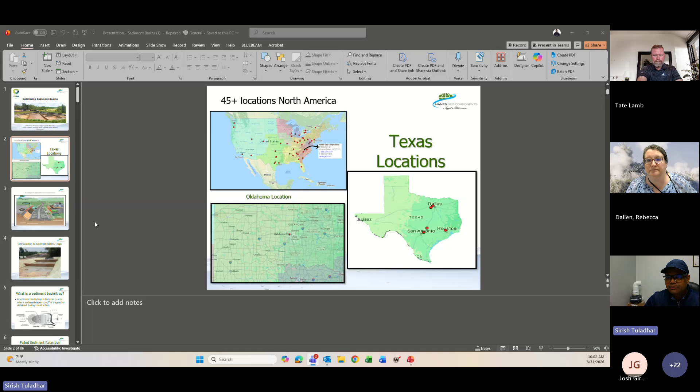Can you see my screen? Perfect, I'll share this one. Looking good? Yep, perfect. Let me just close the door real quick, sorry. Our office gets very loud as the day goes by.

Thank you, Rebecca, for a great introduction, and thank you Central Oklahoma Stormwater Alliance for this opportunity to present. The topic today will be optimizing sediment basins, but I'll be covering most of the products that Hanes carries, and we'll be talking about different ways to optimize the sediment basin.

Before I do that, I'm Sirish Tuladhar, technical sales engineer for the North Texas and Oklahoma area. And we have Tate Lamb, our Oklahoma regional sales manager as well. Do you want to say anything, Tate?

I'm happy to be here, Sirish. Thanks for taking the time to do this. Rebecca, thanks for bringing us in, as we're a new affiliate member of this organization, and hopefully this will be the first time many of you are meeting us, but maybe more to come. So thanks everyone for being here.

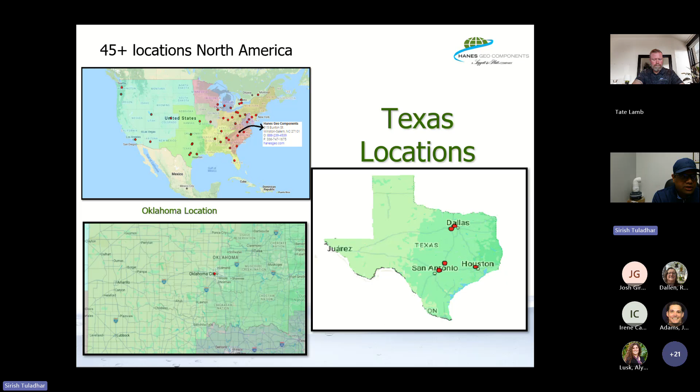Hanes products are categorized into 3 different groups. We have geosynthetics, which is mostly geogrid, geotextile, gabions, geomembranes, and also erosion control - we carry all kinds of light, medium, hard armor products like Flexamat. We also carry products from Solmax and light medium products like Pyramat and all that stuff. As far as sediment control, we carry all kinds of silt fence, wattles, anything you need. As far as stormwater, we have SD pipe, CMP pipe, and we also do quite a lot of underground retention and detention systems as well.

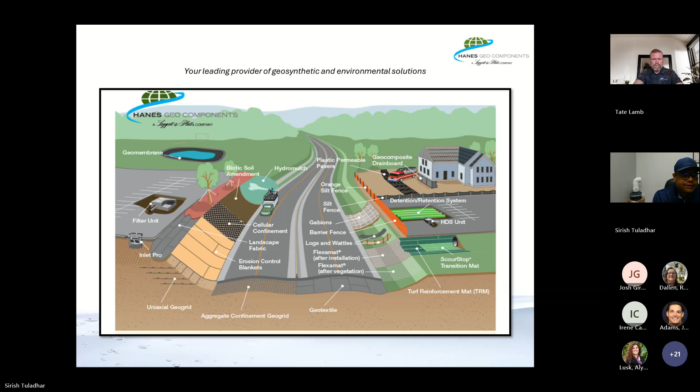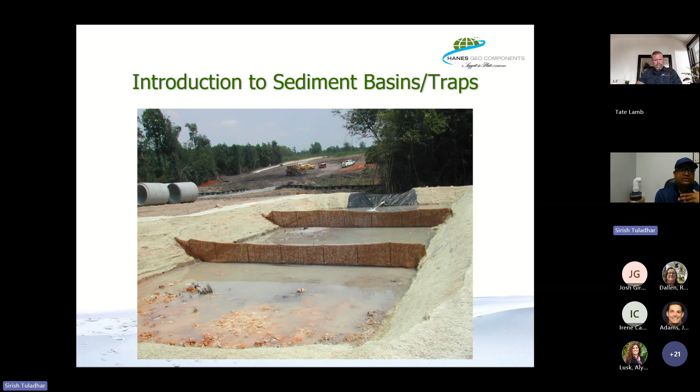So this is what I'm going to be focusing on, introduction to sediment basin trap. This is getting really common now. It started in North and South Carolina, Georgia, Alabama, Indiana. They commonly use the sediment basin, but it's slowly moving to the central South, like Texas, Oklahoma, and you see quite a lot of this in different projects. Especially in Texas, I see this every week, like 3 or 4 times. I have to design skimmers based on the sediment basins. So it's getting quite popular. Today, this series will try to educate a lot of engineers or contractors about sediment basins, how important it is in capturing the sediment.

So what is a sediment basin? A sediment basin is a temporary area where sediment-laden runoff is trapped or detained during construction. Basically, you're digging a hole and water flows in through a pipe or channel, and the dirt settles over time, and water is discharged through a pipe in a cleaner fashion. It might be a temporary or permanent sediment basin. You can see in the plan view, the water comes through a pipe or channel, first going through the turbulent zone, then through the laminar zone where most of the sediment settles, and then the cleaner water washes out through the outlet.

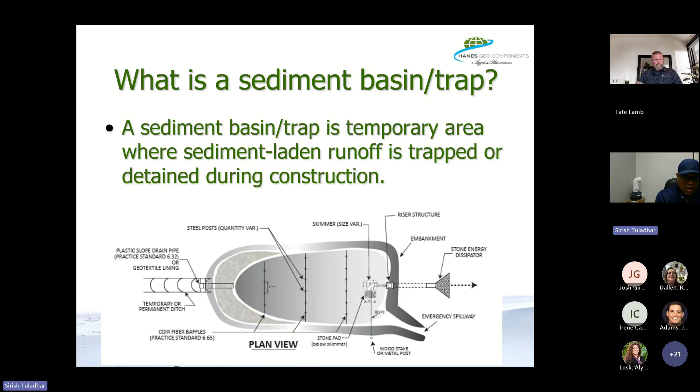So some of the reasons why we use sediment basins: first, you see on this picture, we sell silt fences, but they are not the strongest product to capture sediment. You see the picture on the right, the silt fence is about to fall down. It lasts about 3 to 4, maybe 6 months - it's not as strong. Also, you see the inlet protection - that's something you want to use in the job site to capture sediment before it enters, but it's something you do at the very end. So it's not great.

Some more reasons why we want to use sediment basins - you see on the picture on the left, the milk crate. I don't know what project that was or who decided to use that, but it's not a way to capture sediment.

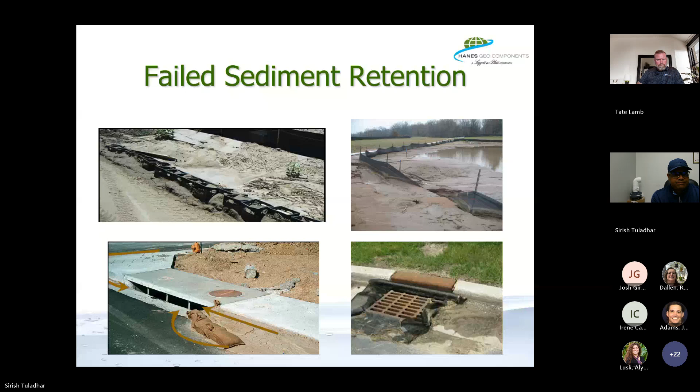So I took this course - this is a great course for any engineers or contractors - a designing and reviewing course on sediment and erosion control. In that course, the author, Jerald Fifield, who sadly passed away, I think about 4 or 5 months ago, was one of the pioneers of the CPESC certification. In that book, he says the only BMP that can create optimal conditions for removing suspended particles out of runoff water are sediment basins and traps, also known as sediment containment systems. These design structures have the potential to remove 75% or more of suspended solids found in runoff water.

So today we're going to talk about how to get 90 to 95% capture of sediment by using different products that Hanes carries, or other products available in the market.

So some more reasons why we use sediment basins - the DEQ, Department of Environmental Quality in Oklahoma, and also Texas Commission on Environmental Quality, for common drainage locations that serve an area with 10 or more acres disturbed at one time, require it to be sized to contain a 2-year, 24-hour storm event - a sediment basin is required. But in Texas, we use sediment basins even at 5 acres. I cover a pretty large area, from Dallas to Fort Worth to almost El Paso. Especially in Dallas it's 10 acres, and in Fort Worth it's more like 5 acres disturbed before you need a sediment basin. Same thing with Oklahoma City as well.

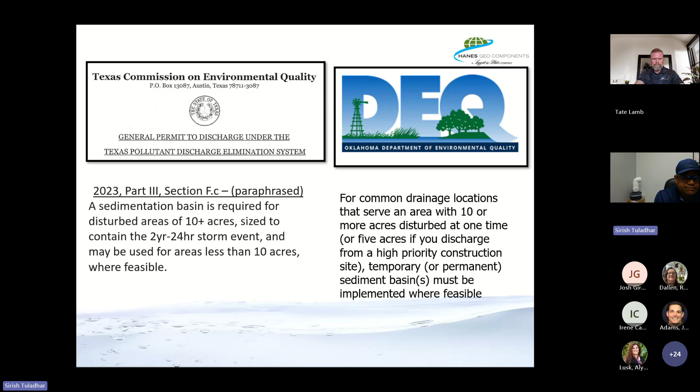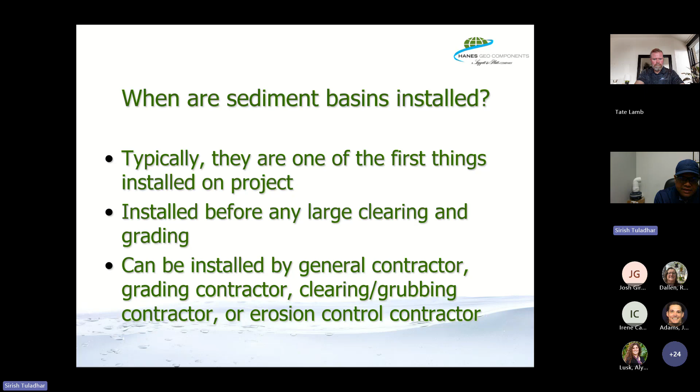So when are sediment basins installed? Typically, they are one of the first things installed in a project, installed before any clearing and grading is done, and can be installed by any general contractor, grading contractor, clearing and grubbing contractor, and also erosion control contractor. This is the first thing you want to install - whenever you're installing the silt fence, it goes along with the silt fence. It's a great application to capture sediment.

It's orange juice ready to be drunk, right? Suppose you're coming back from a vacation, and in 5 or 6 days you come back and look at the fridge, you see all the pulp in that orange juice settled down, right? That's a similar way the sediment basin works as well.

Basically, it's the drag force, right? There's different particles in water, and they settle in different time. I'll talk more in detail in the next slide. Bigger particles like gravel have a bigger drag force, that's why they settle faster compared to other particles like silt and clay.

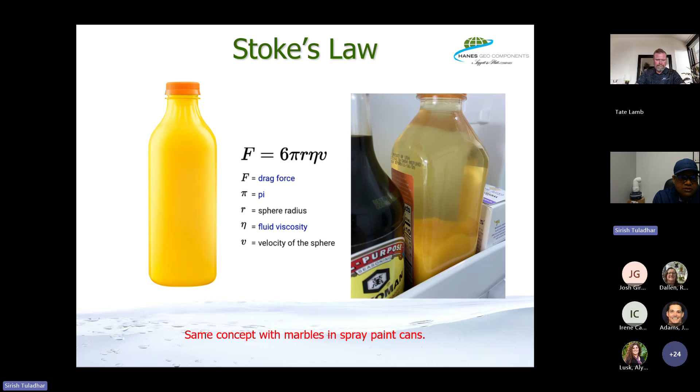So we're going to talk more in this presentation about flocculant as well. I have this soil water that I brought in from Howey, Texas, and I'll show you how some of these particles settle -- colloid particles -- within about 10 to 15 seconds by adding some of these polymers. I'll talk more about it in the very last slide.

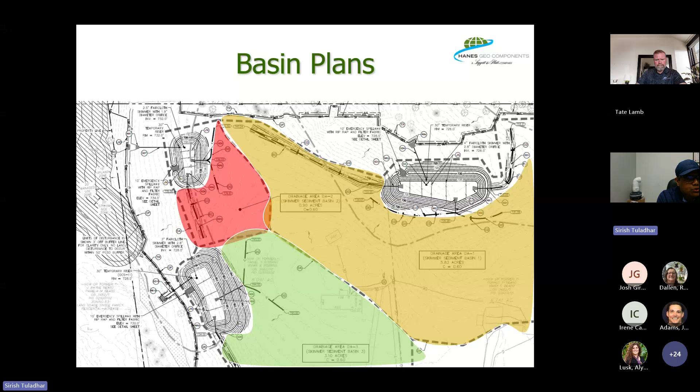So basically, this is how the drainage plans work. Anybody who is an engineer who designs sediment basins knows how the basin plans look. You see on this basin plan, the pond sediment basin on the right side is bigger compared to the sediment basin on the left side. The right side is actually 5.6 acres disturbed, so the sediment basin is a little bigger. Just an example to show you how the drainage plan looks for the sediment basin.

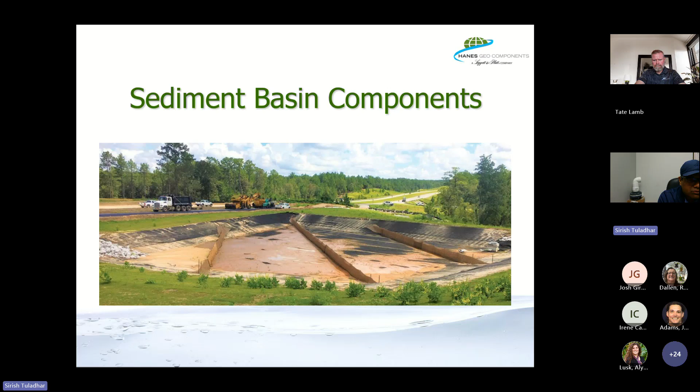So now we're going to talk about different components. We talked about just adding a sediment basin, you can get up to 75%, right? Now we're going to talk about different sediment basin components you can use to get that 90 to 95% capture of sediment. First would be inlet and forebays.

You don't see this quite a lot in Oklahoma or Texas -- a rock fill weir, also called a check dam, or a gabion forebay. It's basically a first barrier to really slow the water down, and it won't cost you a lot -- it's very cheap. Using this can get you up to 90% of sediment capture. This is something very cheap, and it's very good to capture sediment.

Next would be our newest product -- this is a newest product we introduced last year, Flexaberm, a really good check dam structure. It's actually reusable -- you can reuse this Flexaberm again and again. We've done quite a lot of projects in Texas. We haven't done one in Oklahoma yet, but soon we will.

I'll show you a quick look at what this product is. Basically, if anybody's familiar with Flexamat, it's actually a concrete block wrap, and we put a Curlex log in the middle. It's a great way to slow the water down and capture the sediment. It's a lot cheaper than regular check dams or rock berms as well. Another thing is those rock berms cannot be used again, but this one you can reuse again and again.

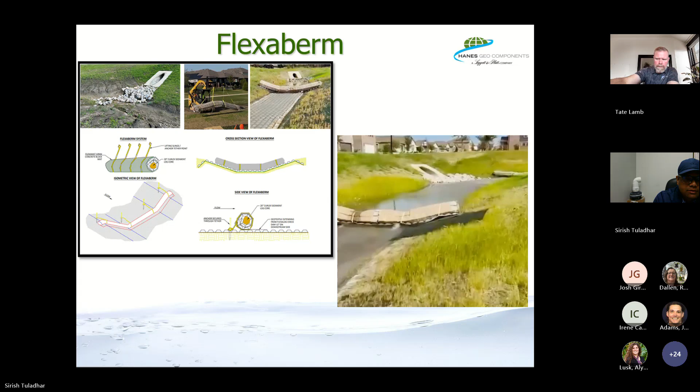So here's a really quick video to show you a project we did in Celina, Texas. You can see the water flowing through it, and at the back you can see all the ponding and sediment settling over time up there.

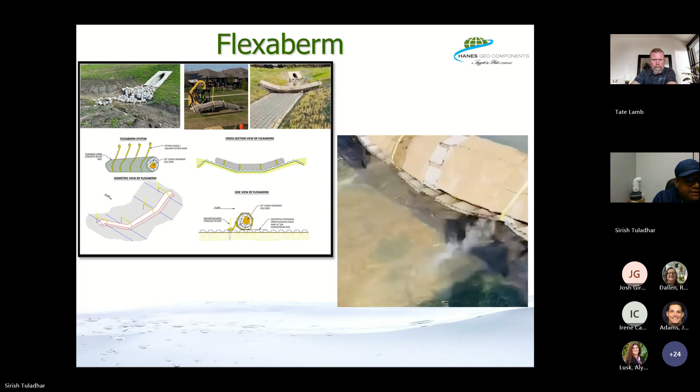Next would be geotextile fabric. It's another product -- you can basically get, for $500, a 15 feet by 300 roll. It's another product you can use under the riprap. If you're already building a sediment basin and you don't use this fabric, the water is just going to erode that whole thing and you'll have more sediment collecting in there. So it's just another product you can use in a sediment basin, geotextile fabric, only $500 to optimize the sediment basin.

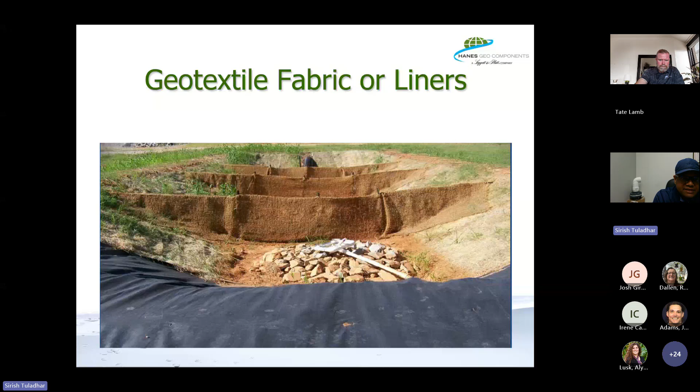Next would be coir baffles. You see quite a lot of this slowly getting into Texas as well. For anybody not familiar with coir, it comes from coconut tree, coconut husk. It's a great erosion control product. What you do in the sediment basin is you have three bays, bay 1, bay 2, and bay 3. You drill a 4 foot post every 4 feet horizontally, then put a coir mat around it and a 9-gauge wire wrapped around it with a T-post, and drape the coir mat over the wire. It's a great tool to slow down the water, and it spreads.

Especially in urban areas, university studies have looked at capture of different size microns, with the biggest captured in bay 1 and smallest in bay 2 and bay 3. It's very inexpensive, and it can greatly increase the chance of capturing the sediment.

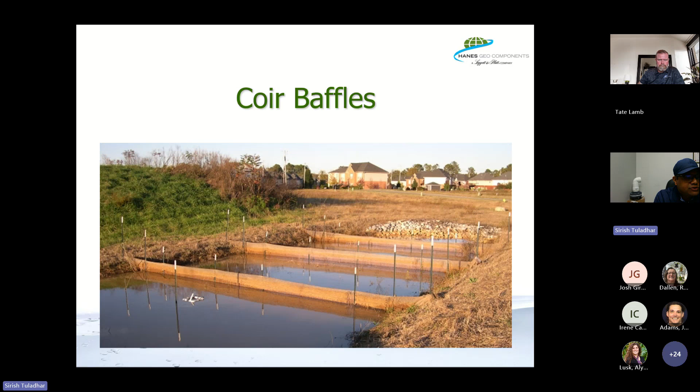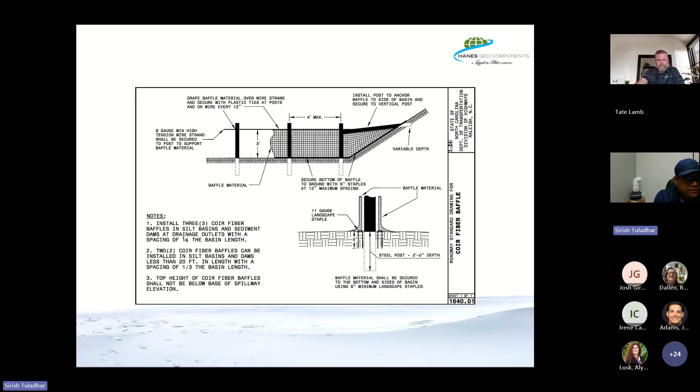Quick picture to show you what the baffle's function is. We have all these details as well, so we provide engineers, if they need some kind of sediment basin, details with the coir baffles and everything. We do provide that.

Next would be silt fence. It's another not-that-expensive product, another option. It's woven silt fence, an impervious baffle. As you see in this picture, water fills in the first bay, and you see a low weir at the very end. From there, when the water fills up, it jumps to the other weir, and then goes to the second baffle.

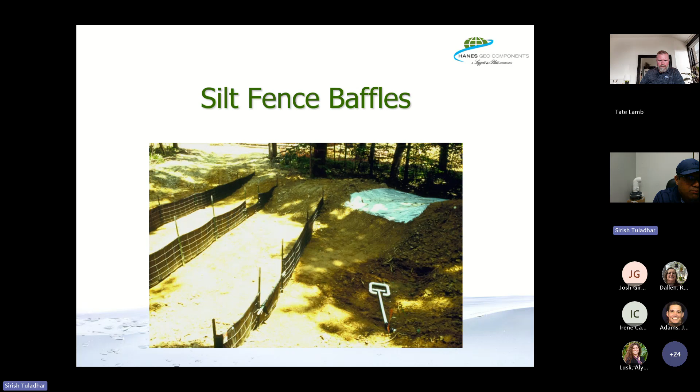As time passes, the dirt settles down and the water becomes cleaner. What it's actually doing is lengthening and buying time as the water goes through the weir. It settles on the first weir and then goes to the second weir. It's another cheap product, and since it's a pervious baffle, it's another way to optimize the sediment basin.

Next would be erosion control blankets. Hanes carries all kinds of erosion control. We also partner with American Excelsior, which is a great partner. We do quite a lot of their erosion control products like Curlex, the lighter Recyclex, and also Tri-Net Recyclex. We carry all kinds of erosion control blankets.

What I'm trying to say is you're already digging a sediment basin. Right after, you never know, in Texas or Oklahoma there's always rain. In my Dallas area where I live, it rains about 65 to 80 days per year. So when you're building a sediment basin, you want to protect the slope. As soon as the basin is done, you want to protect it with some erosion control blanket. What if you don't do that? All the sediment is going to get washed away and collected again. Since you're already building a basin, this is another cheap application you can use to optimize the sediment basin.

Next would be skimmers. It's another great product, basically a floating device. We'll talk in more detail about skimmers because we have a new skimmer in the market. We carry all kinds of skimmers, but especially this new skimmer that we came up with is a great way to reduce the cost. You're already building a basin and adding skimmers, which are not cheap. Bigger skimmers like 8 inch and above could cost you about $7,000 to $8,000. So we have a skimmer that can actually reduce that cost to half.

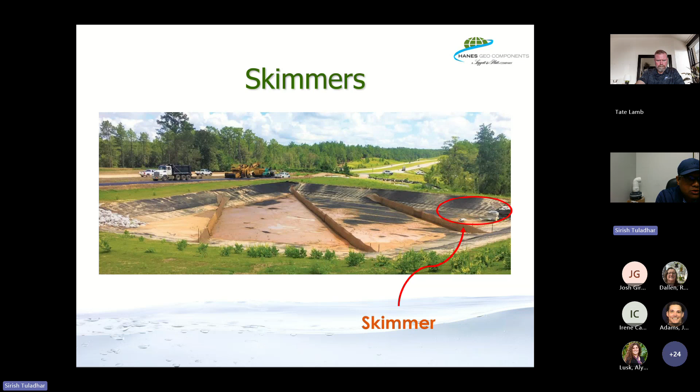It's basically a floating device. Over time, when the sediment settles down, the cleaner water is what goes out through the outlet structures like skimmers.

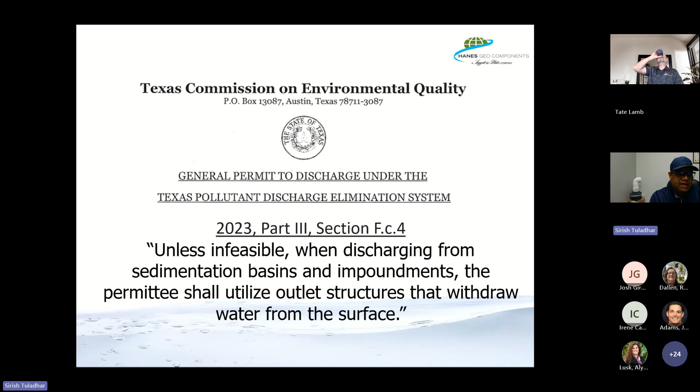This is another great slide, especially regarding TCEQ. There was a little change in 2023: when discharging the sediment basin and impoundment, the permittee shall utilize outlet structures that withdraw from the surface. I'm still getting into Oklahoma, just started, doing more research on it, trying to see if skimmers are required there or not. But especially here in Texas, most cities like Frisco and newer cities like Celina are implementing this, requiring water to be drained from the top by using skimmers.

So what does the skimmer do? Basically it floats. Over time, they have dry storage and wet storage in the pond, and the very top is the clean water. All the sediments settle down, and cleaner water is drained from the skimmer outlet as well. There are different kinds of skimmers in the market, and all of them are very good, but we'll talk about our skimmers in more detail.

Just a quick one to show you, you see on the very bottom, you can actually put like a gabion basket. You don't want to drain that very bottom dirty water. You want to let it settle down, and that's why we have that little rock at the bottom, about a foot of retention as well.

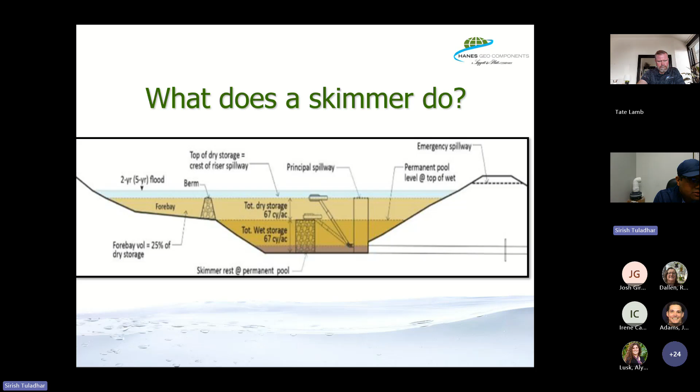So our first skimmers, there are different skimmers in the market. We have the Faircloth skimmer. We use quite a lot of these in North Texas as well. It's one of the grandfathers of skimmers, invented 25 years ago, one of the oldest in North Carolina as well.

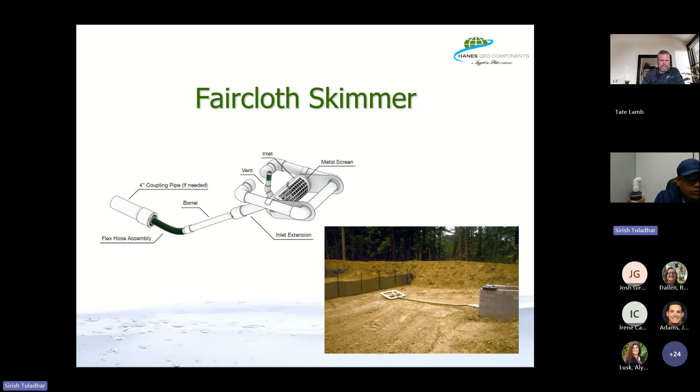And then we also have the Erosion Supply Company skimmer. We use quite a bit of these as well. You see they have 4 legs at the bottom. What it does is as it goes down, those legs stop it from draining that dirty water.

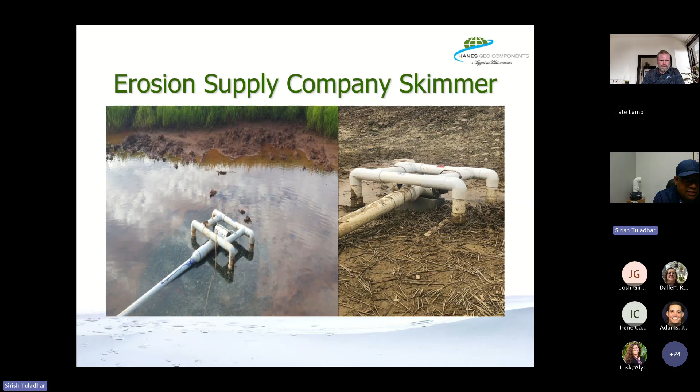Most of the skimmers you saw earlier are constant flow skimmers, but the one we have, the StormSkimmer, is a variable flow skimmer. As the depth increases, you see the valve at the bottom opens slowly. We have a slide for that, we'll show you more.

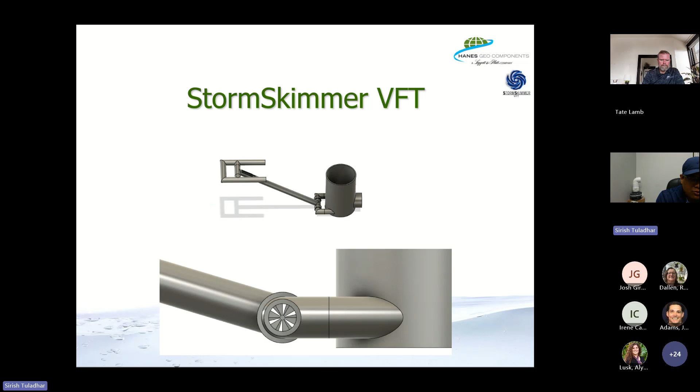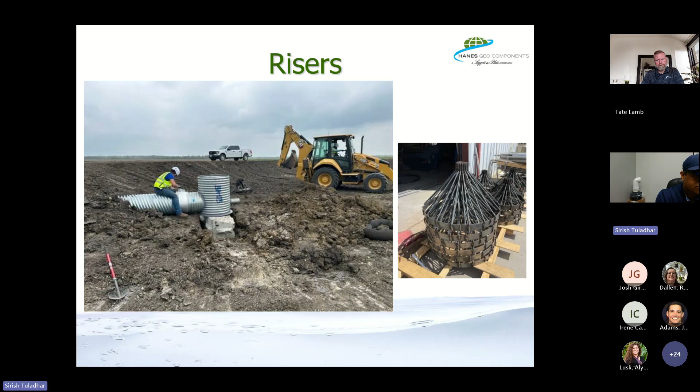We can also use TRM, turf reinforcement, as well for the spillway. It's a great product. Flexamat, if you don't know, is a 6.5 inch by 6.5 inch wide block, 2 and a quarter inch thick, cast in a geogrid, and it's great. It's one of the most used in different applications - you can use it in channels, outlets, landfills, shorelines. We also talked about the Flexiberm, which is part of Flexamat as well.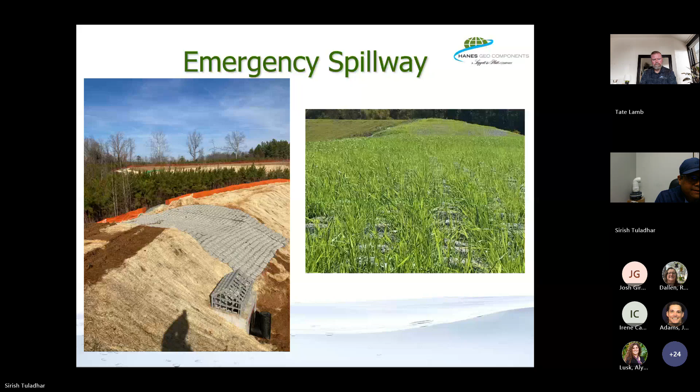This is how a stabilized basin should look. You want the basins to look like this - the inspector is happy when they see stuff like that. You see them on the forebays, most of the sediments are settled. As you go down, you'll see the baffles - bay 1, bay 2, bay 3. This is what the inspector wants to see, and they'll be very happy - the contractor is following the rules and doing a great job.

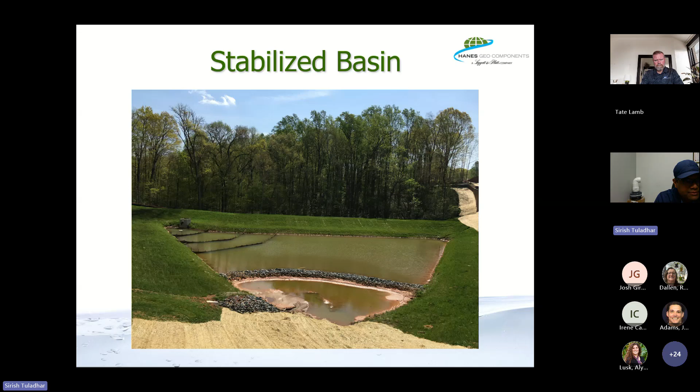This is another slide where you see a temporary basin. A lot of people ask, does the skimmer stay on forever? Technically not - once construction is complete and the entire project site is stabilized with vegetation, the skimmer device can be removed and you just plug that bottom in, replacing it either with the permanent outlet structure.

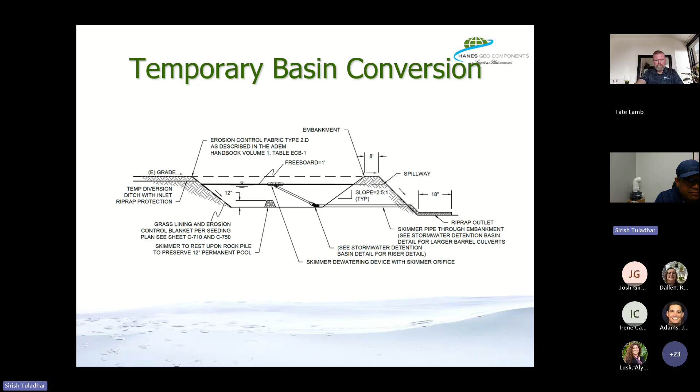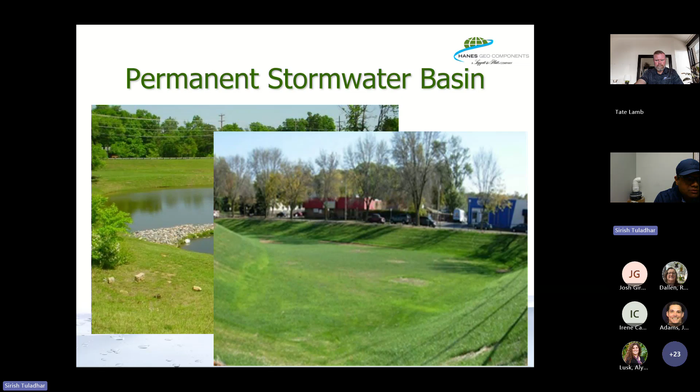Like in my next slide, you can see this is how the permanent stormwater basin looks. I see quite a lot of these in Oklahoma as well, and this is how it's sometimes seen - quite common in the DFW area.

Now I talked about different components to optimize the sediment basin, right? Next I'll be talking more about three things: the dimensions, a little bit about how to design it, and then I'll talk more about the flocculant.

We have a little soil sample here from Howey, Texas. I'll show you how fast these little polymers can settle the sediment quicker. And then we're going to talk about our newest skimmers in the market, the storm skimmer, in a little more detail.

And then you have particles like colloids, which never settle. Those particles are always the problem when the neighbors see a dirty pond and complain about it. So those are the colloid particles which never settle down.

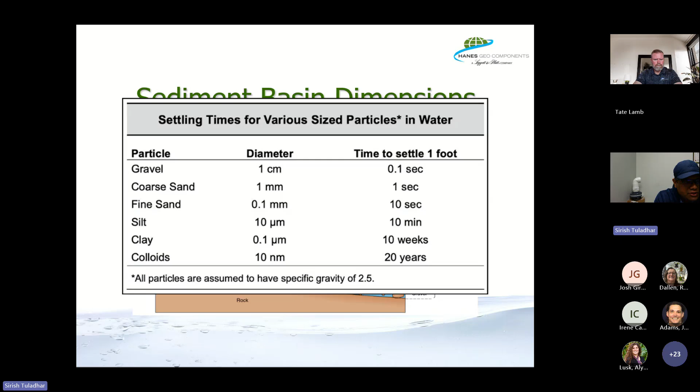Before we talk about how to size the pond and different aspects, we first need to talk about this. This is the slide we talked about earlier, how different particles settle. It's great to know how different particles behave before we design the sediment basin.

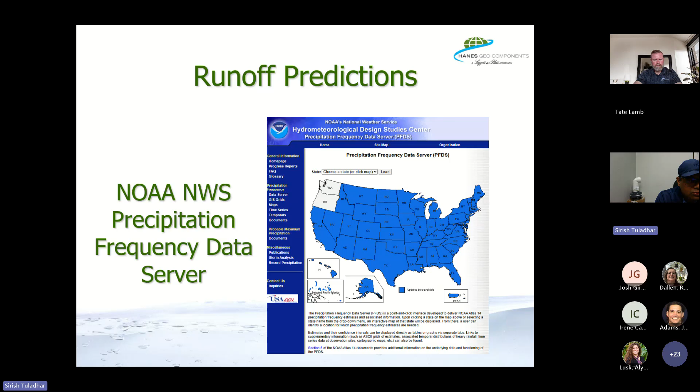This is another great resource, NOAA.gov. It's great because if you go there, you can actually find your 2-year, 24-hour rainfall data. It's a great tool NOAA has. Just like that, I took a quick example of rainfall data from 2 cities.

I took Amarillo, Texas, which is the Panhandle, and then I took the Tulsa, Oklahoma data. And you can see the 2-year, 24-hour event for Amarillo is about 2.72 inches, compared to Tulsa, Oklahoma, which is almost double.

Basically what I'm trying to show in this slide is, obviously if you disturb 100 acres in both areas, the pond in Oklahoma is going to be much bigger compared to Amarillo, Texas.

So per TCEQ or DEQ, when NOAA data is not available, or you're just doing a budgetary estimate, you can also use a simplified figure: 3,600 cubic feet per acre, especially for Oklahoma City or Texas. But if you go to a more arid climate, it's about 1,800 cubic feet per acre. And if you go a little bit north into a tropical climate, it's about 5,400 cubic feet per acre.

Basically what we're doing here is, if you take just 5 acres of land and want to find what volume is going to flow into that basin: 5 acres times 3,600 cubic feet per acre gives you 18,000 cubic feet required volume. So it's a great tool to find the volume of the basin.

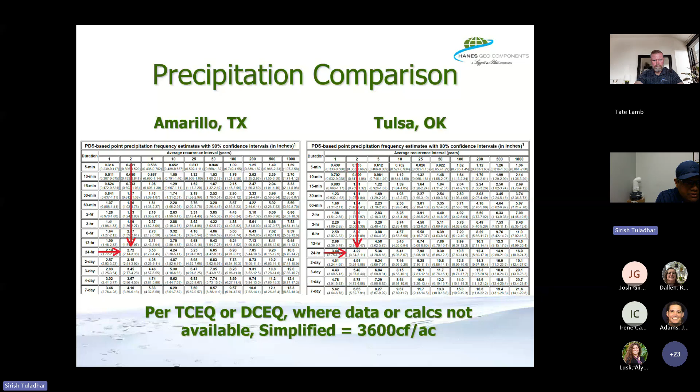Next would be sediment basin dimensions. When you talk about sediment basin dimensions, there's a happy medium, as far as length-to-width ratios or minimum average depth.

The water is basically coming through a channel and it goes through the turbulent zone where a lot of the bigger particles settle. And it goes through the laminar zone. The laminar zone is one of the important zones, that's where most of the sediment settles.

So you want to design a dimension that's perfect. You don't want to design like a 1-to-1 or a 6-to-1 ratio. If you have a 6-to-1, the water's not going to reach the other side. And if you have a 1-to-1 dimension, the water's just going to rifle through with higher velocity.

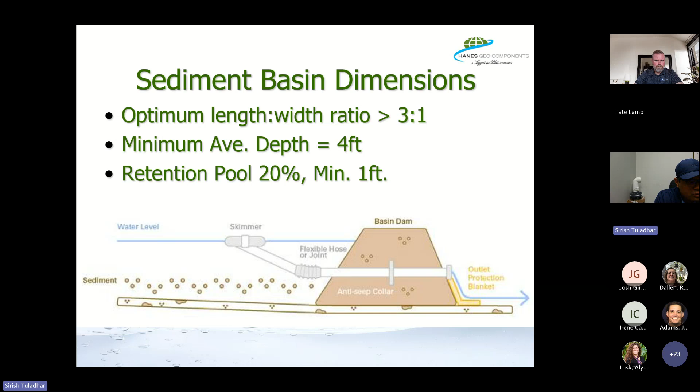And also this next slide, you see where the skimmers are connected, right? You can actually connect right through that, right below that dirt where the water settles. You can see that where it's connected to the berm, right? You can do that as well.

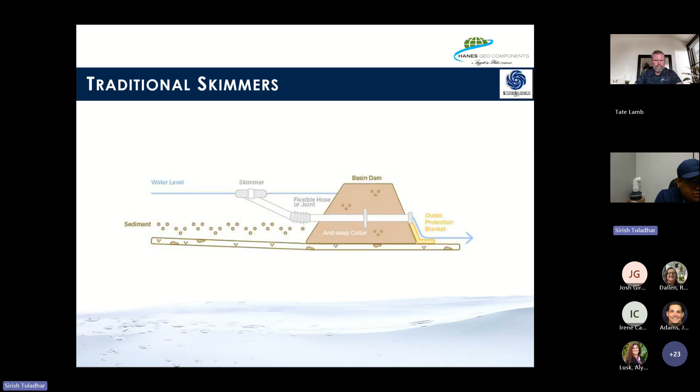Now we're going to talk about different traditional skimmers. We talked about the dimensions, right? Most of the skimmers you see in this market have a fixed orifice size. You see one on top, East Coast Erosion Supply, and they all have that common orifice on top, constant flow. I feel like it's designed mostly for smaller ponds, but everything is bigger in Texas or Oklahoma, right? That's why we came up with this new skimmer, a really, really good cost-saving skimmer, and it's actually a variable flow skimmer. We'll talk in more detail about it.

So basically, when you talk about traditional skimmers, you have basically 6 inches of head pressure. So no matter where it floats, 1 foot, 2 feet, wherever it floats in the water, the water is flowing at the same rate for all the skimmers, whether it floats at 1 foot, it doesn't care, right? But that is fine. But everything is bigger, like in Texas or Oklahoma.

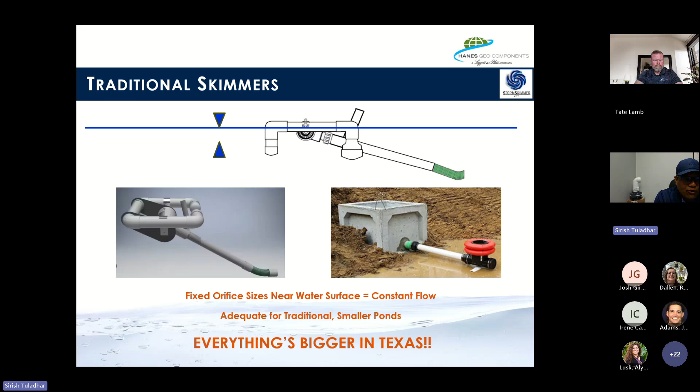That's why when we design a sediment basin, especially TCEQ or EPA tells you to design a pond for a 2-year 24-hour event, and we have to drain within 2 to 5 days. Some areas in the DFW area it's about 72 hours drain time, so basically you have about 3 days to drain it. But how does a sediment basin work? It works by the sediment settling over time, but we don't technically have the time because EPA tells us to drain within 3 days. The reason why is because the next storm is coming, and you want to hold as long as you want, but you have to drain in 72 hours. That's how you size the 2-year 24-hour event.

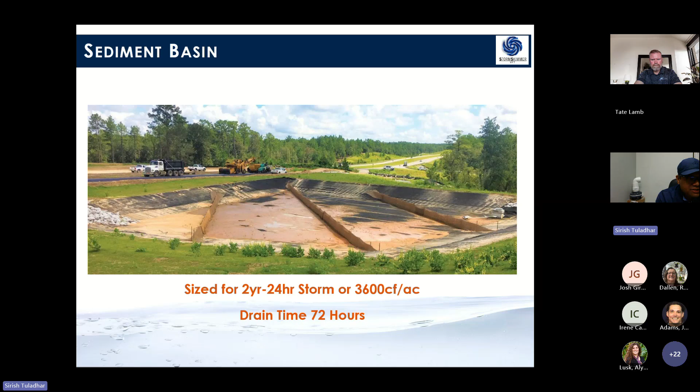So that's why I took this example out of Central Texas, North Texas, Central Texas in Austin.

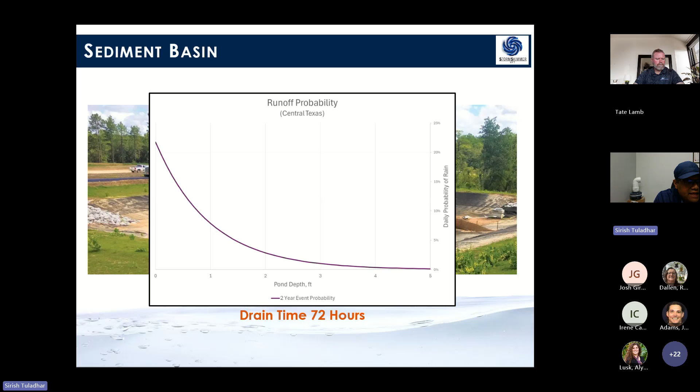So basically, if you look at this, in a pond, theoretically for a 2-year 24-hour event, you're saying 1 out of 730 days the pond fills up. So there's a very low probability of filling the pond, especially here in the DFW area or Oklahoma area. There's always an average of about 80 days per year, which is about almost 22% probability of some kind of water in this pond. But EPA or TCEQ or DEQ tells you to drain the pond when it gets full in 3 days. So based on that, we have to design the skimmer that can drain the pond in 3 days. So that's why this is a great example.

You see that, traditional skimmers, constant flow skimmers, you drain—we're looking at a 300,000 cubic foot pond. In this example, to drain in 3 days, you're telling us to discharge 100,000 cubic feet per day. It doesn't matter where the skimmer is at, 1 foot, 2 feet, 3 feet. So basically we are doing dirty discharge, blasting a lot of water, even in 6 inch, 7 inches of rain. So it's kind of unnecessary. That's why we came up with this new product called a storm skimmer.

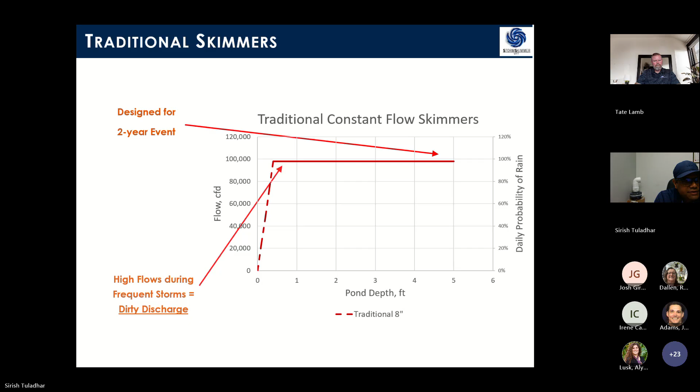Quick video to show you.

Basically, what we are doing is, ordinarily, anybody can see this—usually it'll be in this position when it's at the very low level, 1 foot above the retention pool. And as the water level increases and the head pressure increases, it opens slowly. So you can see that, it only drains what is necessary. So we'll talk in more detail.

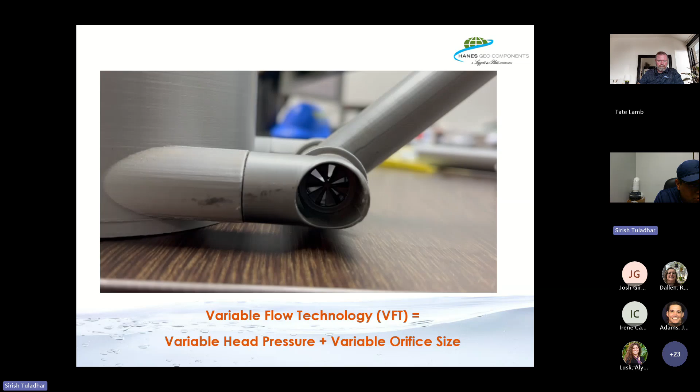This is variable flow technology with variable head pressure and variable orifice size.

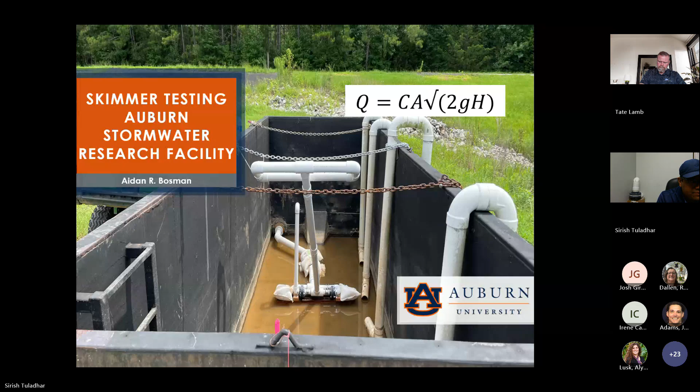For a sharp edge orifice, a common value is 0.61 or 0.62, but it's all over the place - it's not constant. So instead of just modeling through the orifice equation, we took this to the Auburn University facility to really find out what the value of C is. That's what we started with, the 3-inch valves.

We actually have a 3-inch, 6-inch, and 8-inch valve. We tested the 3-inch orifice with a 30-degree opening, max flow at 4 feet, and the valves open as it goes up. In this next slide you can see as it goes to 4 feet, that's where we have our peak flow. And as it goes down, it closes - you can see the hydrograph going down, that's when it closes.

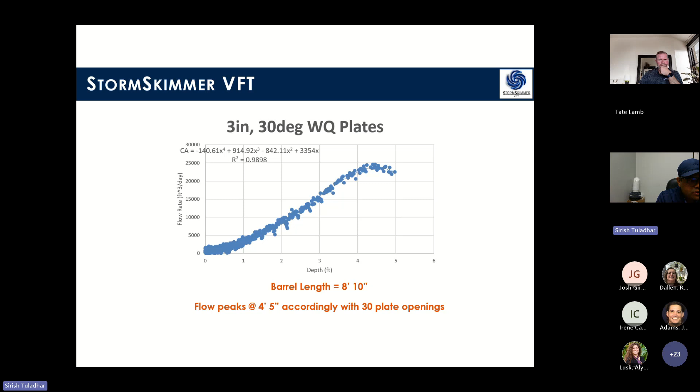As far as barrel length, it's always going to be double the height - basic trig equation.

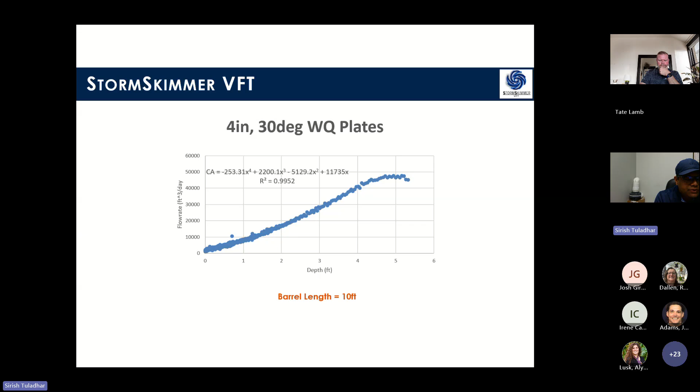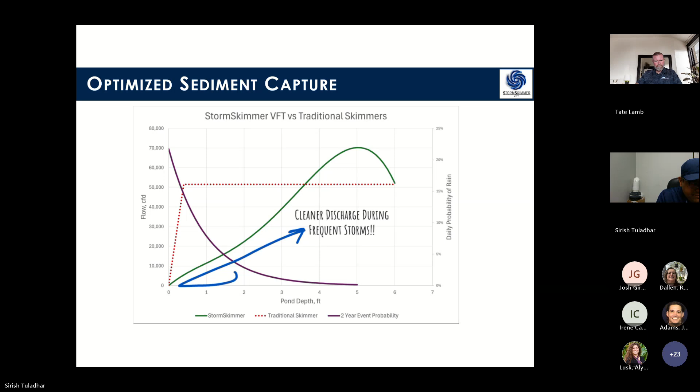Just like that, you can go to our website, stormskimmer.com, to size the ponds. It'll give you a whole data set of different stages, minute by hour - it'll give you a whole data on it.

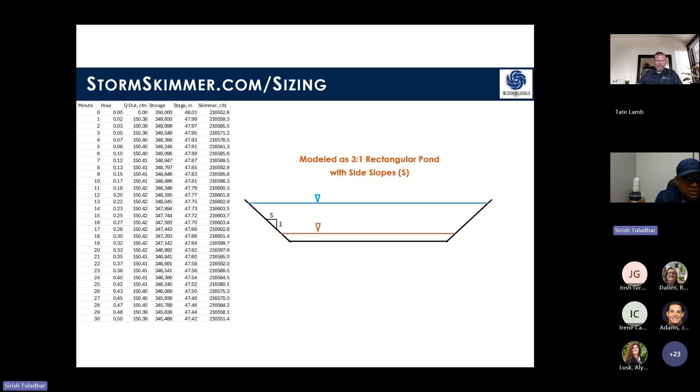Another good thing about our skimmer is it's already pre-assembled - we do it here in North Texas. Compared to other skimmers, you have to make those on site, and it might take you a couple of hours just to install it. Whereas our skimmer comes in 3 components: the head, the floating device, and the down tube and valves. It's already pre-assembled and should be shipped to you right away.

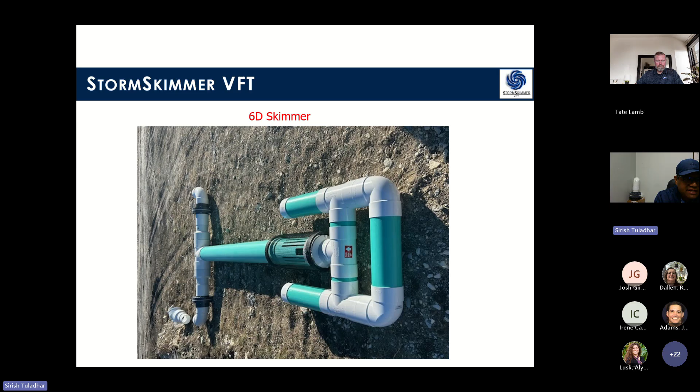This is our 6D skimmer, one of our biggest. We use it for 8-inch - especially if you have an 8-inch traditional skimmer, you can use this 6D skimmer for that.

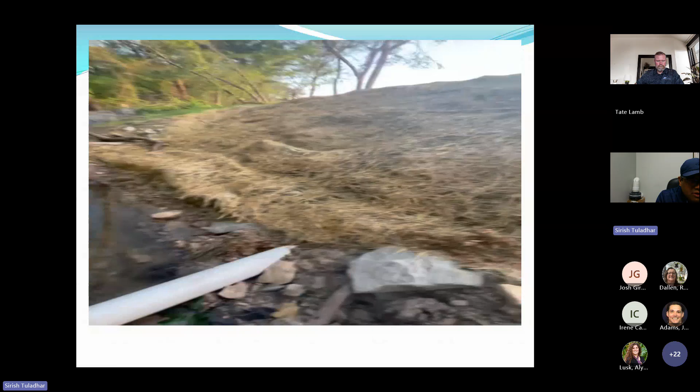A quick video showing our storm skimmer. We've installed this storm skimmer probably 100 times in Texas by now.

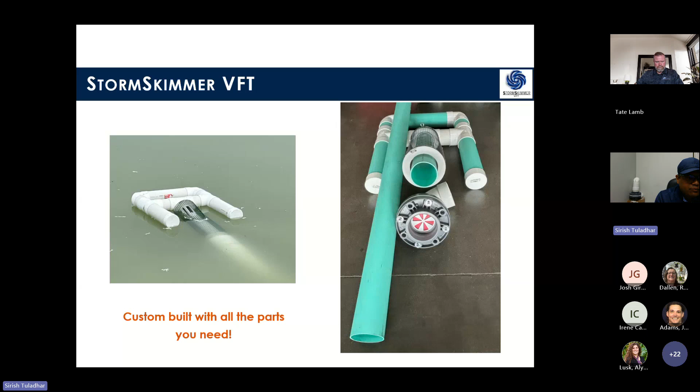It's custom built, like I said. We can make it here in North Texas.

So next, our final product - I'll be fast on this one since I'm over 5 minutes - will be the flocculant. Flocculant is great, we usually have different vendors that make those. One we use is Applied Polymer Systems - they make the polyacrylamide flocculant. How does flocculant work? This is a great demo I'm going to show you - just the dirty water right here.

I'm gonna add one of those polyacrylamide flocculant in there, just like that in the pond. When it flows, you add some of these on those channels, right?

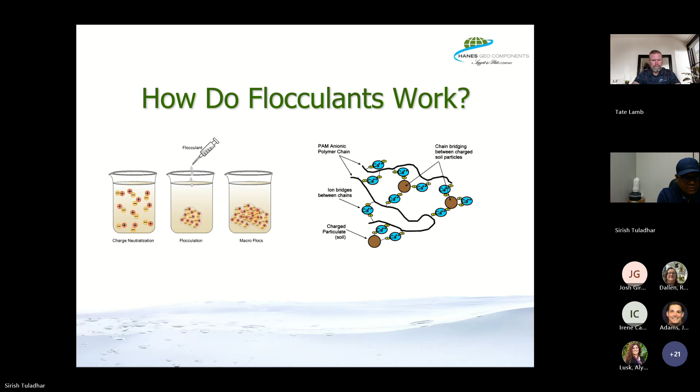There's different kinds. This is one of the most popular flocculants that we use, right? Polyacrylamide. It's an anionic flocculant.

There's two kinds, the cationic and the anionic. Cationic is the one you don't want to use, right? Because those are very harmful for the fish, it usually kills the fish. So you want to make sure you use the anionic flocculant.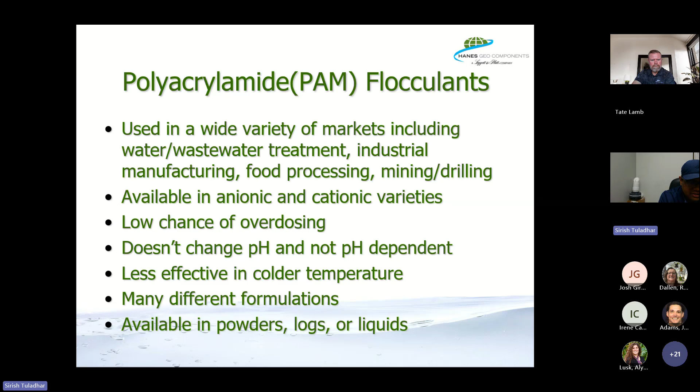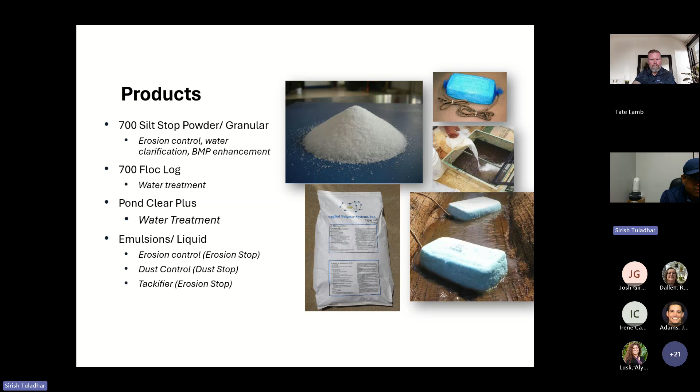So there's different applications, treatment solutions using this product.

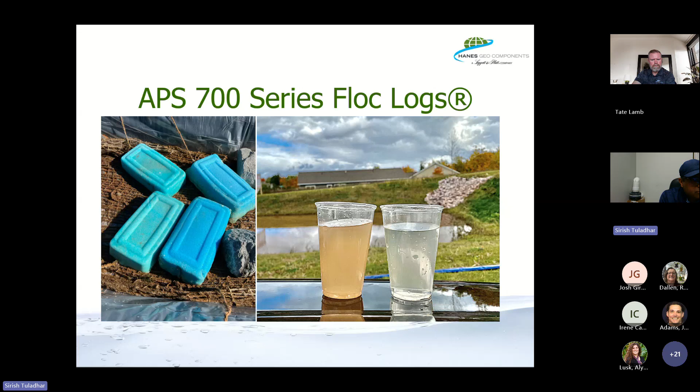What we were talking about earlier, then we have cation, which we don't want to use, right? Like I told earlier, it may require a special permit under the EPA Construction General Permit.

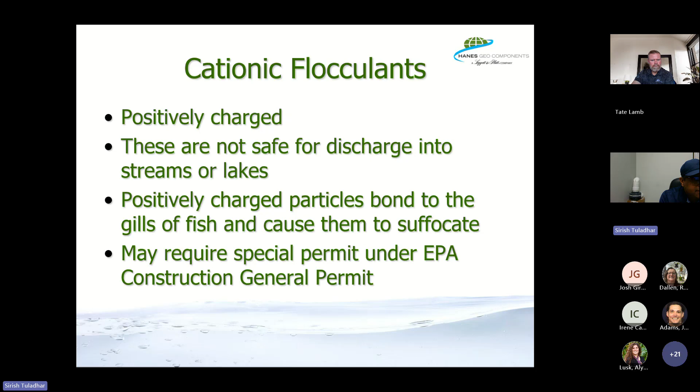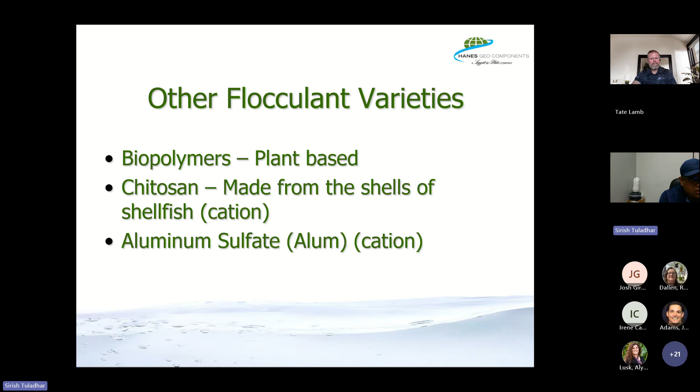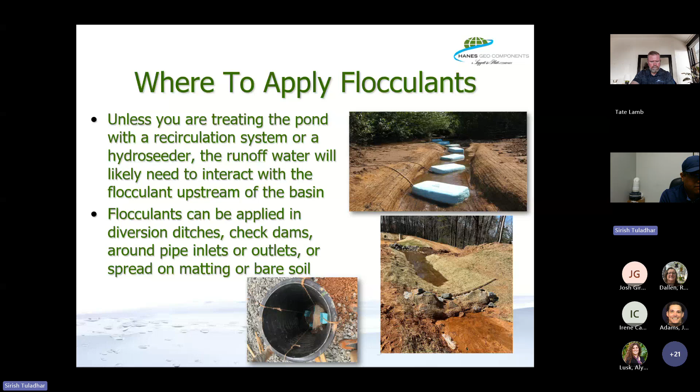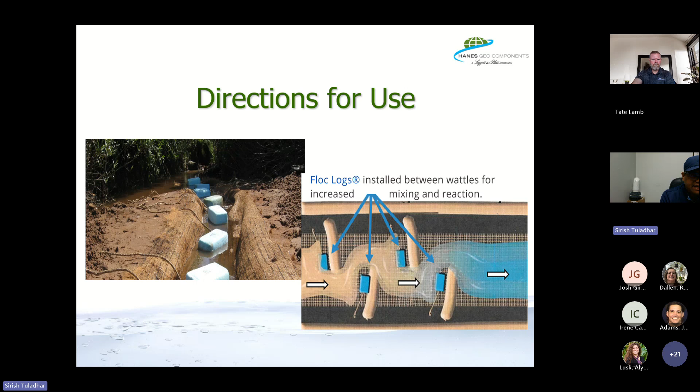Where to apply? You can apply in some of those channels and ditches, diversion ditches, around pipes or outlets. This is a great slide showing you want to use it in between some wattles so it helps increase the mixing time, which is very important because you don't want to waste those flocculants.

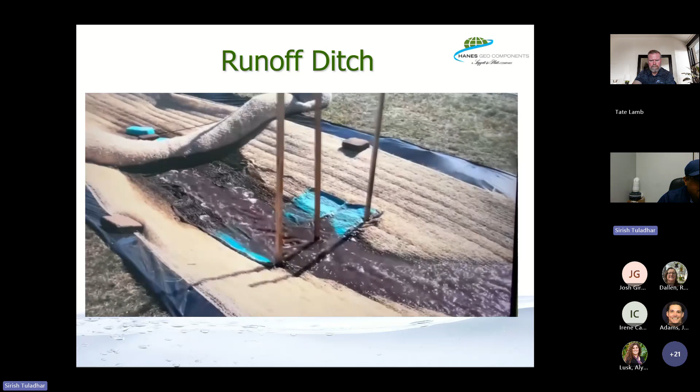Quick video, you can see how fast it goes down, right? This dirty water comes out really clean. See on the next slide, as it comes down, all the dirty water is coming out very clean.

This is a project we did in Greensboro, North Carolina, where there was a lot of complaint about this dirty water, and we treated with this flocculant. It was actually the bentonite flocculant, and with several treatments, they had clean water within a couple of days.

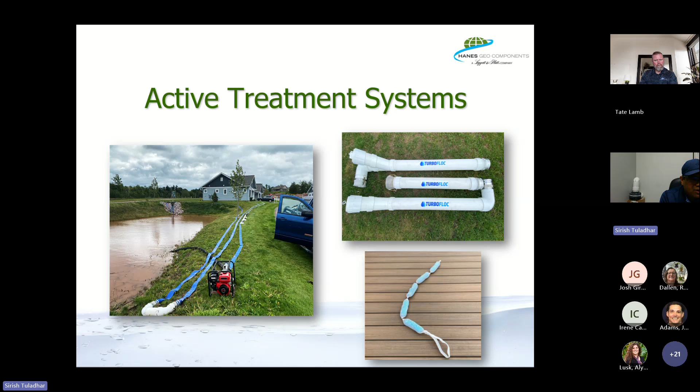We also have all those powder systems and everything. Those were all passive treatment. We also have active treatment systems as well, which is very expensive, and we don't recommend it, but we do carry that as well.